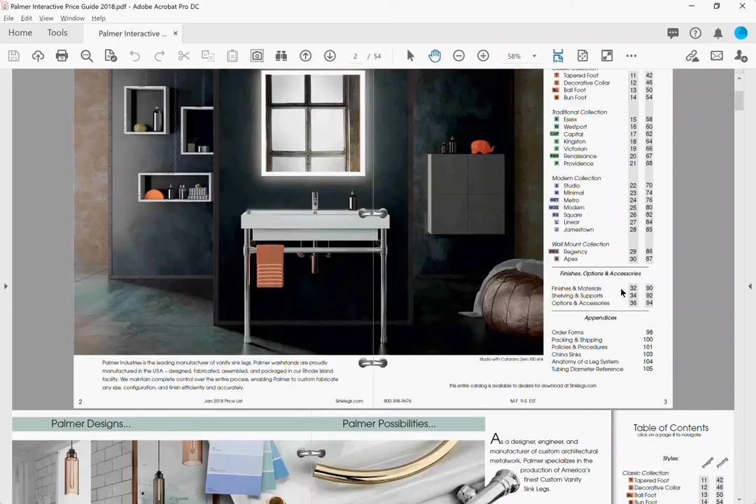One thing that we didn't cover, let me pull up the Palmer guide here, because these are the kind of industrial products that we're seeing more and more of today. The hammered ball is something that we're starting to see more and more of. I'm going to blow this up here. So it comes in all of these different leg series that you see listed below, with the different icons, and then all the different finishes.

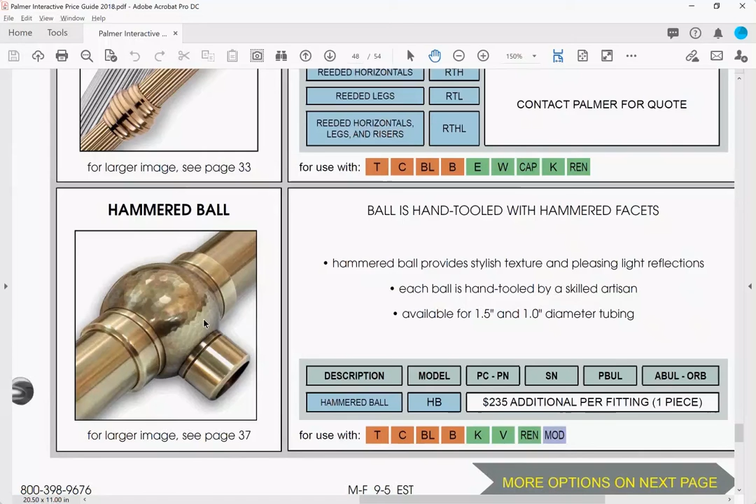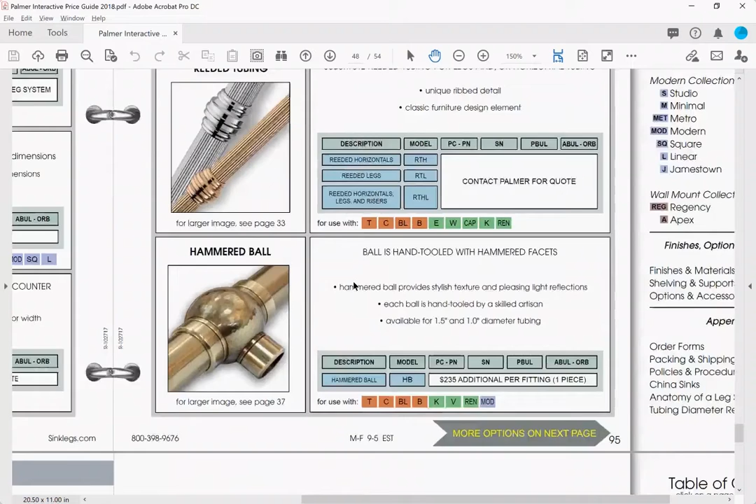And these can be mixed and matched. If there are multiple balls on the leg style, it could be just certain ones, or it can be all of them. So it's $235 additional per fitting. Obviously you would have at least two, and then you could have more depending on the leg style and whether or not you had shelves and all that kind of stuff. So that's something we do more and more of today, it just kind of fits into that industrial style.

So I do want to go over the shelving real quick. You will see there are a couple different types of shelves here: the tubular shelving, the cantilever shelving, and the bracket shelving. So in the tubular shelving, which is what we do the most of, this is going to be where you would do things like you see here in a kitchen example.

Open shelving is huge right now. I probably do 2-3 quotes a week for shelving. We do have some dealers who put it on display. As you can see here, you can have it from ceiling to counter, or in this example from the ceiling down, and then each one of these returns will screw into the wall - there'll be an anchor in the wall for them to attach to.

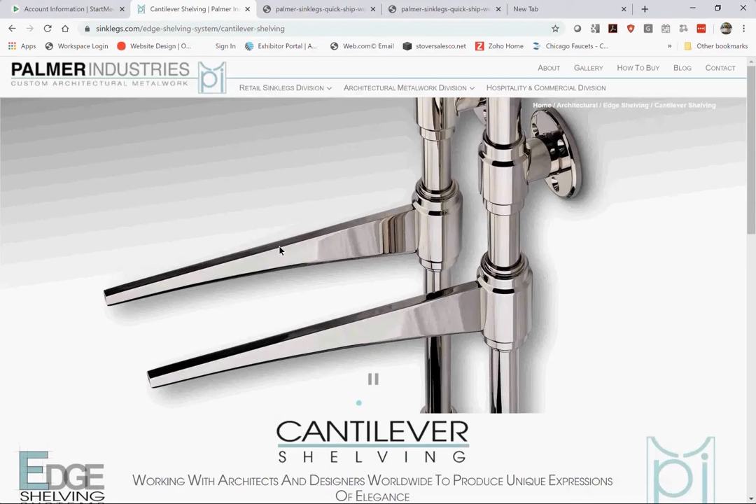I do have several quotes out right now with it, so I think it's growing. It's going to be more.

The one thing is these finials can be on the top of the support of this support leg, or it can just be a cap or a different type of cover. So as you'll see when we look at this here, it's just a cap, or it could be that finial.

It mounts to the wall. So 2 locations here, 3 shelves. This can be customized to be more shelves, or it could be 2 shelves. You can customize it to different widths. I have one right now that I think is 7 feet, so we have 3 risers to cover that 7 feet.

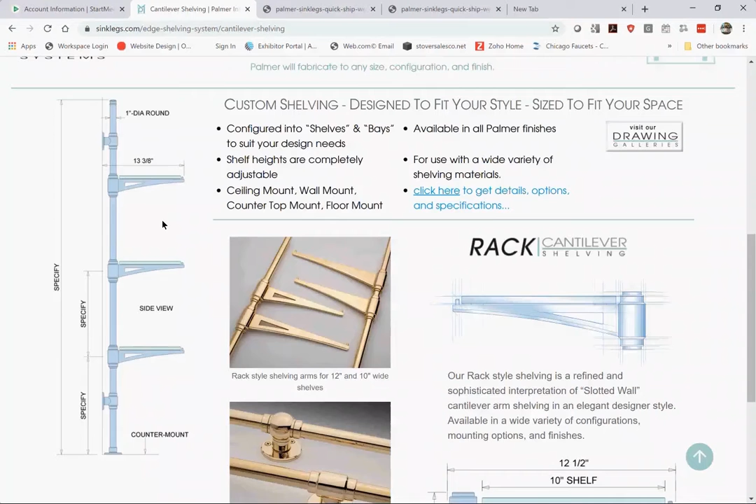So you can do tons of different things. These are our standard dimensions for this, but again, this can be customized as well. These can also be done in split finishes, so you could do a matte black with unlacquered brass, and so on and so forth, in a combination.

And then you have what's called the bracket shelving, which is basically where we're supplying the support and you're supplying the shelf material. We also can do this. I have a project right now we're doing this on, and we're providing everything that you see here.

Let's go back and pause this here. So we're providing the rail, the hooks. The project I'm working on has everything in the same finish, not in split finishes. We're not providing the shelf here; they're actually using a stone shelf. And I think, if I remember right, there's 6 of these going throughout the kitchen.

So it's another opportunity for you to be able to pick up some extra business that you didn't have before. But let's talk about how this is priced.

So if you choose to do any of the architectural shelving, whether it be the bracket shelving, the cantilever shelving, or the tubular shelving, you will be given a retail price and you will be given your cost. The margins will not be what you're typically used to in the retail sink leg division. The reason is it's a very competitive business.

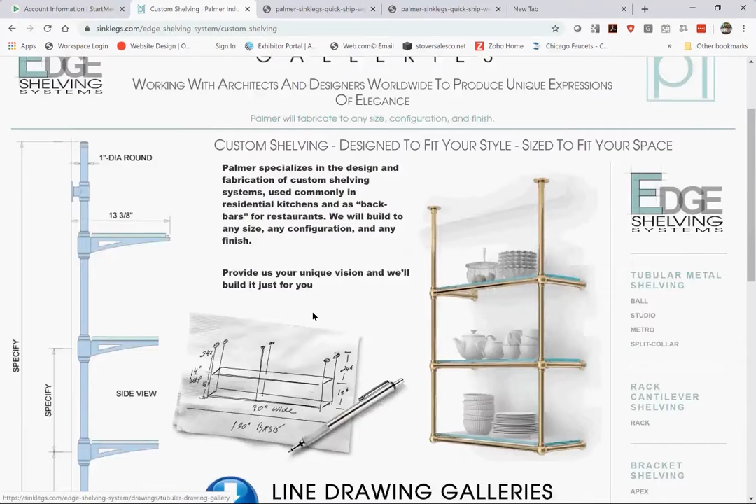And so Palmer knows, because they've been doing this for years before they opened this up to us as the retail side of the business, that we will keep the price point to where it needs to be for you to be successful. There is this drawing gallery that we've put together that will guide you as well with information here.

So if we're doing tubular shelving, we'll just download one here so we can see. And you can actually take this information, if it's pretty simple and straightforward, and change these dimensions. For example, if you know this is the setup that you need, but it's going to be 70 inches or 50 inches, whatever, you can change this dimension here.

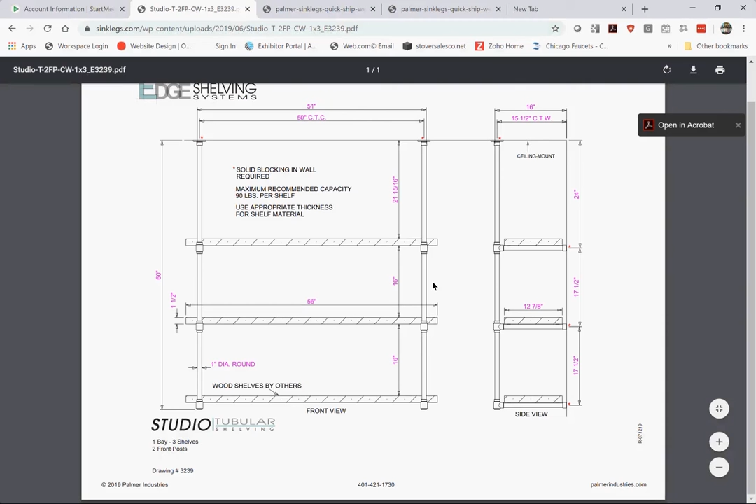You will need to tell them the thickness of the shelf, because we want to make sure everything is balanced. And because that'll change, if the thickness of the shelf changes, that'll change this dimension if you don't change it here. So you can utilize these different sheets to help you in the process if it's simple like that. But if it gets into something very complicated, that's when you really just want to put Palmer together with the designer and let them figure out exactly what they're trying to accomplish.

Any questions so far on those?

No, but I do want to reiterate that we can supply the glass shelving if you want it, but it can get kind of pricey, so oftentimes we don't usually do the glass shelving. They maybe work with a local glass dealer or somebody like that, but we do have the capability to do glass shelving in the quote as well.

Yes, and one of the things where I sell glass, if it's standard glass, you see in this photo here how this is standard glass. See how it's very green in this picture? You can buy that anywhere locally, so you're not paying freight on it. You're not taking the risk of it getting damaged, and you're probably going to be able to buy it for less, because Palmer is not a glass supplier, right?

Where I sell more of the glass is if somebody's looking for what's called, there's different terminologies for it, low iron, or I can't think of some of the other names right now, but basically where the glass has very little iron in it, so you don't get this very dark green line.

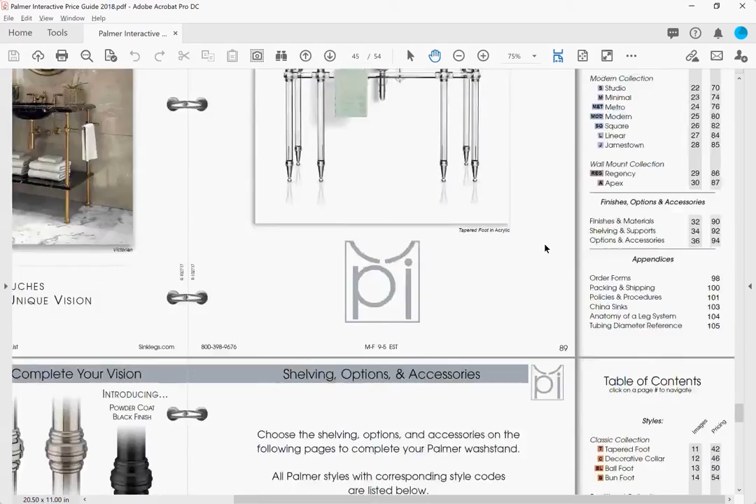While we're talking about the price book, let's go back. Okay, one of the things that didn't tell you in the video, and I think is important because I have this in a project right now, is that they are not set on the actual size. They're kind of debating, is it going to be 36 or is it going to be 34, and so forth.

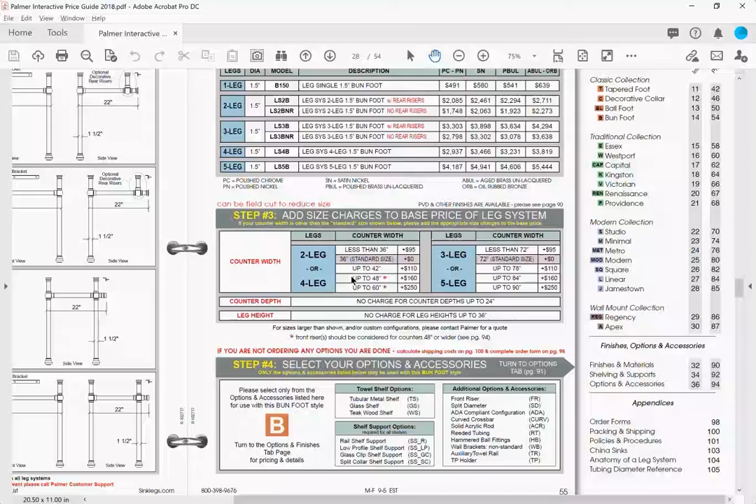Right above step 3 on every page, it's going to write this in red if it's available, and it can say a couple different things. It can say not field sizable, or it can say can be cut in the field to reduce size. In this example, you can reduce the height, the depth, and the width. For others, it will say width can be reduced, depth can be reduced, and so on, so forth.

So if the customer doesn't know, and sometimes if they don't want to pay the upcharge, they can buy a 36 but they need a 24, and they don't want to pay us the $95, which I highly recommend they do. But some people are like, oh, we'll just cut it in the field. If you don't know, then you can do that. We did that in our design center.

We didn't know exactly which sink we were going to put, whether it was going to be a 27-inch sink or a 30-inch sink, so we just brought in the 36 and ended up cutting it down to fit the sink. It's really simple, you're cutting brass, so just a good sharp metal blade and you can cut it. It's very simple because you got to put it together anyway, so before you put those pieces in, you just cut that width. Our depth was good, we just needed to change our width, and because we didn't know and we needed to get it in, we went ahead and made that.

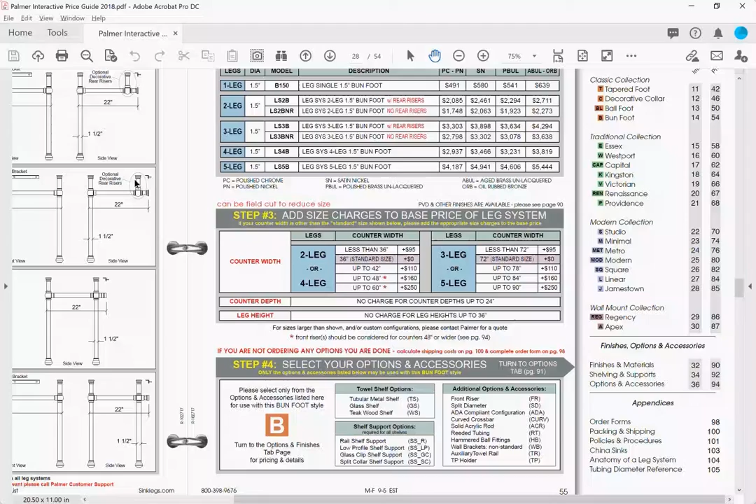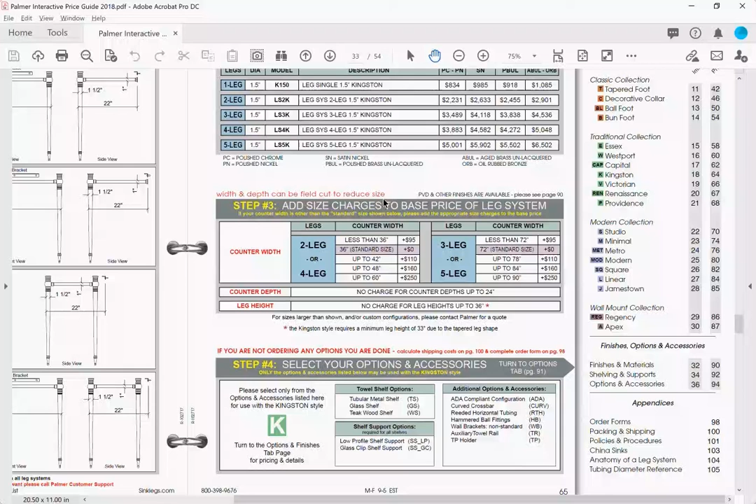So it'll tell you if it can be done or not in this little area right here above each of these. Let me see if I can find - here's a different one. It says width and depth can be field cut, so you can't change the height in this one. The one we were just looking at, you can change all 3 dimensions. So that information is there too, which they didn't cover.